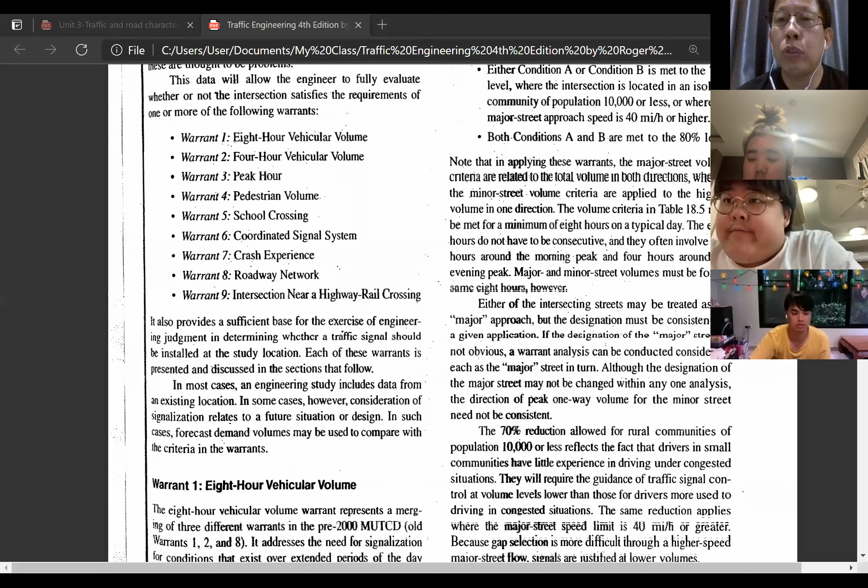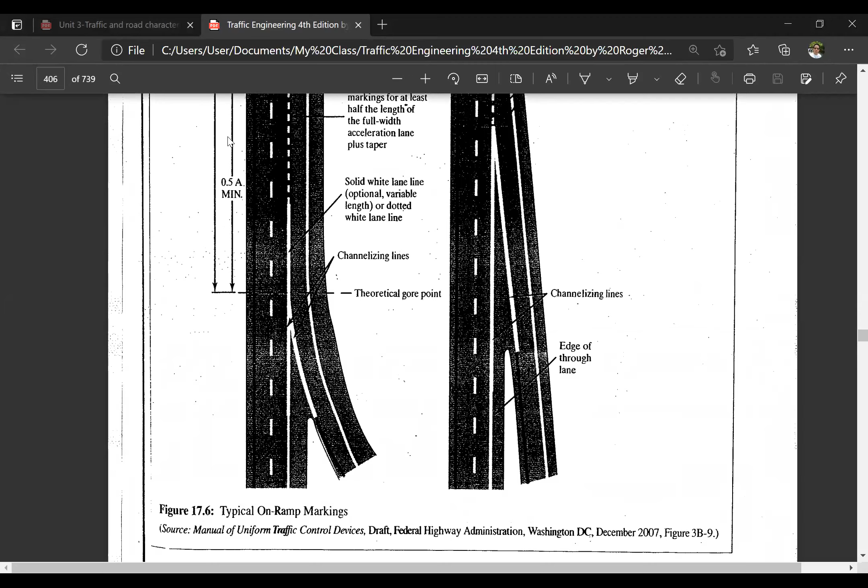This is the traffic engineering handbook. I said I want to start with chapter 18 first, because I will go back and forth.

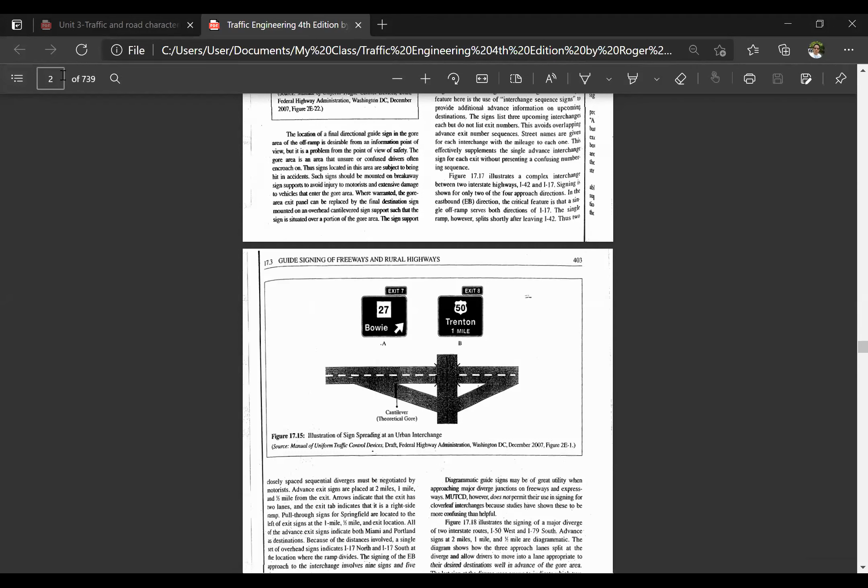This is the section. I found an interesting link for you with many presentations related to highway engineering and other resources. This is what I found. I don't know whether you have ever found this, but I think this link is cool.

Slide player. Okay, I got a nice summary of this chapter, the intersection control chapter, from this link. It's saving me a lot of time in summarizing the details of this chapter into these slides, and other resources can be found here too.

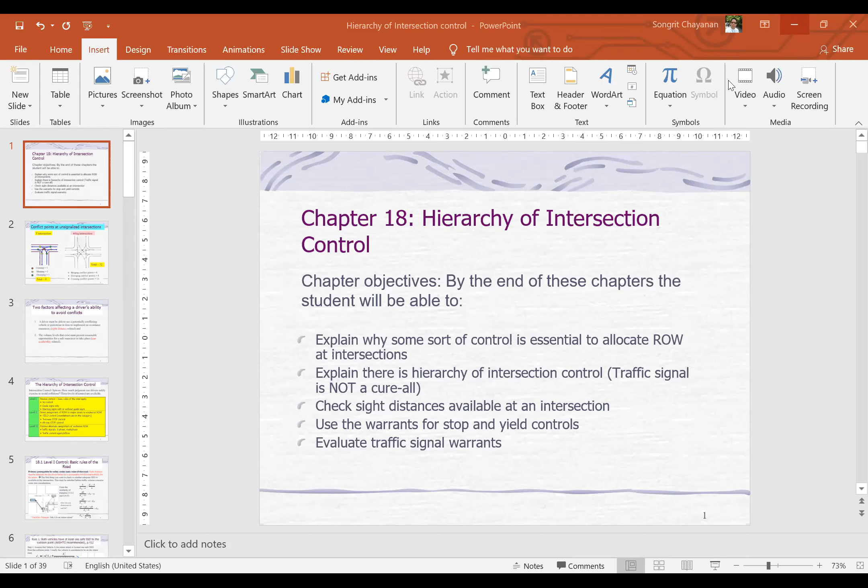Okay, is this my screen, right?

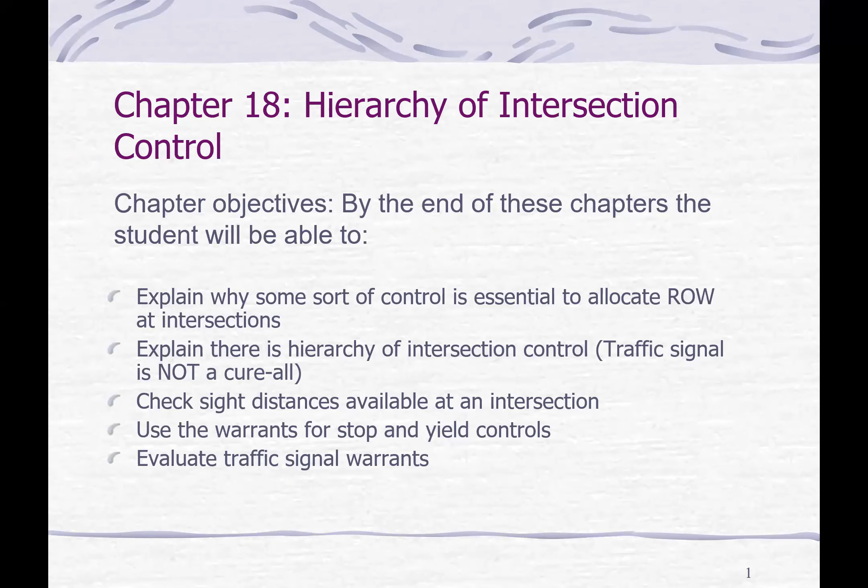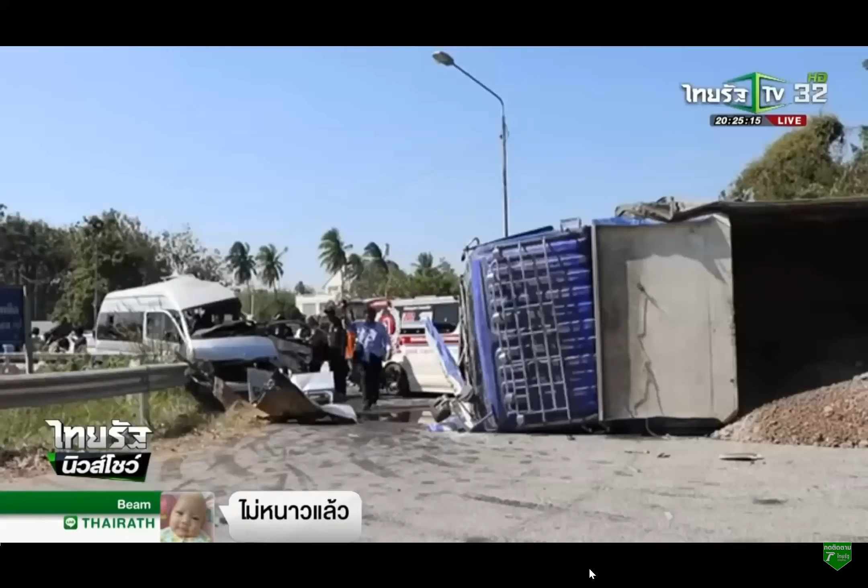What do you think? Did you see the clip? Yes, I saw it. Okay, what do you think about this intersection?

Can you kindly guess and explain from the physical, I mean, road geometry? What do you think? I'll share the screen.

Okay. If you've seen from this angle, this is from the CCTV angle. You may not see all the signs very well, but it's clear that the van did not stop at all, because maybe the driver was not familiar with this area.

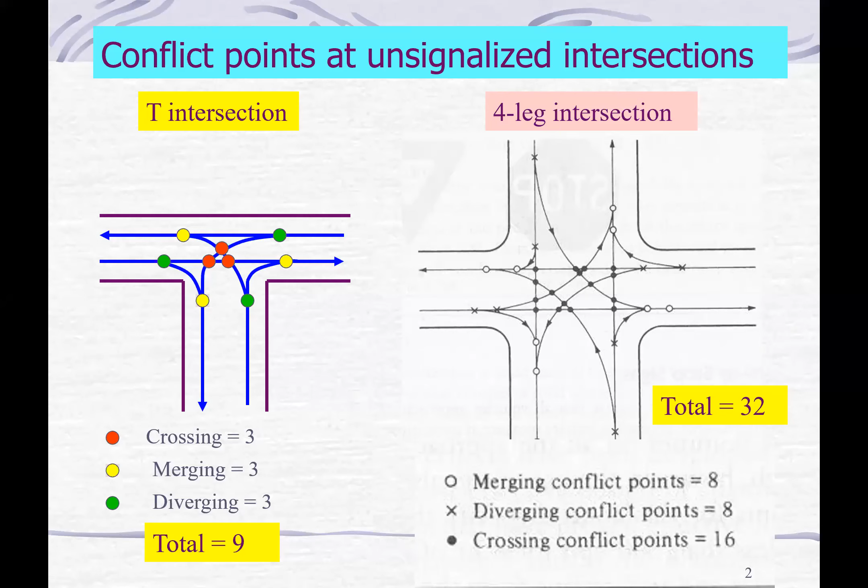So not only the diagrams that I show, but driver ability, like those examples. If there are enough sight distances for them, for either the truck driver or the van driver, to be able to stop ahead, then that collision wouldn't occur.

So there are two factors affecting a driver's ability. One is a driver must be able to see a potential conflicting vehicle or pedestrian in time to be able to avoid the collision. That means to be able to brake and stop safely.

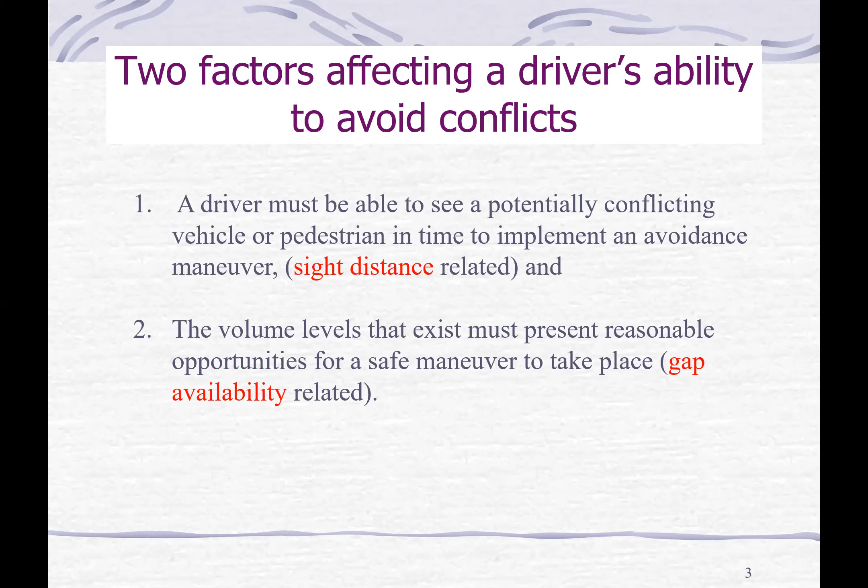Secondly, the volume levels that exist must present reasonable opportunities for a safe maneuver to take place. That means the road you are crossing or entering has enough gap for you to get in. If these two are not met, then as a highway engineer or traffic engineer, you need to consider some other methods to protect this driver.

Okay, there are three levels of control. The first level is passive control, the basic rule of the road. This may be okay in the United States, but I think it's very, very dangerous, like the situation you just saw in Thailand. No control means maybe a street in a residential area with very low volume — you place only a guide sign or warning sign without guide control.

A warning like 'intersection ahead', but there's no such control as stop control.

For level 2, you have a direct assignment of right of way to the major street, or rotational right of way. Rotational right of way means a roundabout. For major streets or major roads, most of the time they are bigger with higher volumes.

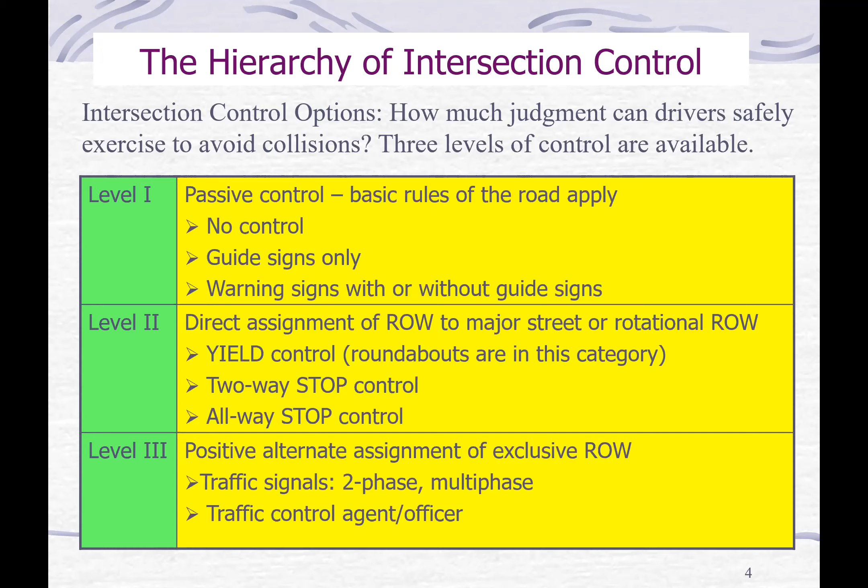Mostly when you put the signal control, the trade-off is there will be more vehicle delays. Okay, so that is the trade-off.

Let's come to the basic rule of road. The basic rule of road is identified as the sight distance. When we talk about sight distance, we talk about the ability that a driver can see potential hazards on oncoming traffic, or on the triangle on the corner like this.

So from the picture you see here, this is the major road on the horizontal, and this is the minor road. As I stated earlier, the minor road may be crossing the major road, or it may just get out on this side only.

This area, presume, is the obstacle, like trees, buildings, or even a tent. Somehow a lot of them become buildings, so that gives you the idea that the stopping sight distance may not be enough for those drivers to make a safe stopping, braking.

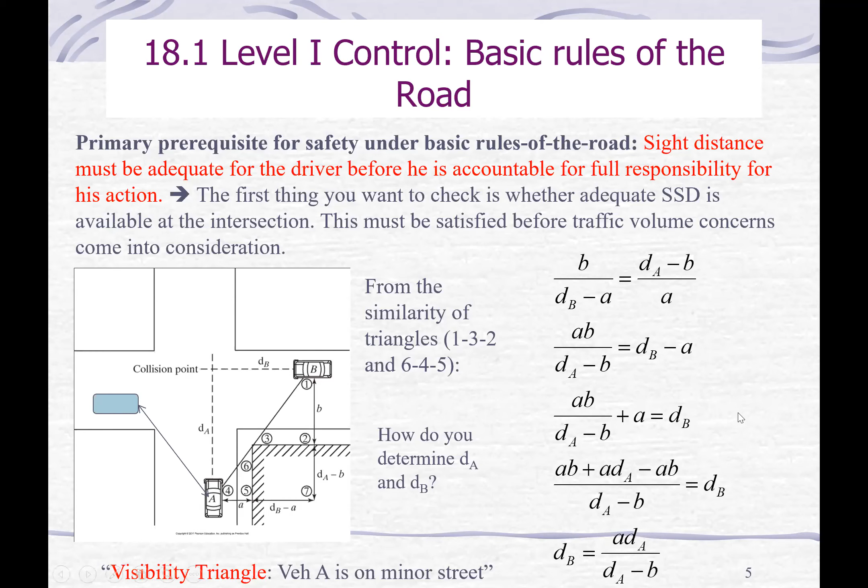What you need to do is find the minimum dB. Let's go to each step. From AASHTO recommendation, stated in page number 412 in that article I sent to you earlier, this slide follows chapter 18 and stated as a reference very well. You can go back and look through that article and text again.

Step 1: assume that vehicle A right here is on the minor street, located one stopping sight distance from the collision point, which is dA. dA can be defined from this equation: 1.47 times speed of vehicle A times stopping time of decision, T, which is equivalent to 2.5 seconds.

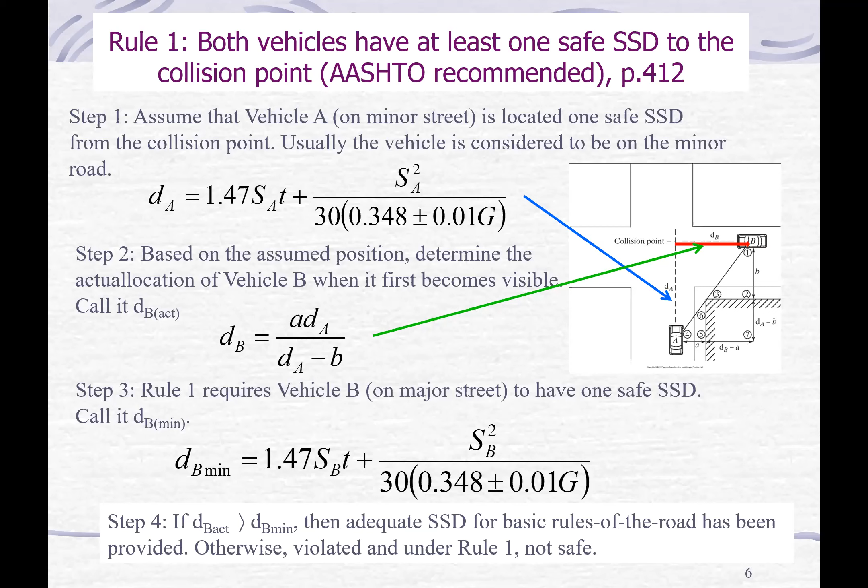According to those equations, if you found that dB act is less than dB min, then what you should do? Then no control cannot be permitted, which means you have to do something—you have to put a stop sign, or maybe consider putting the speed limit on the major street, or remove the obstacles to increase the sight distance.

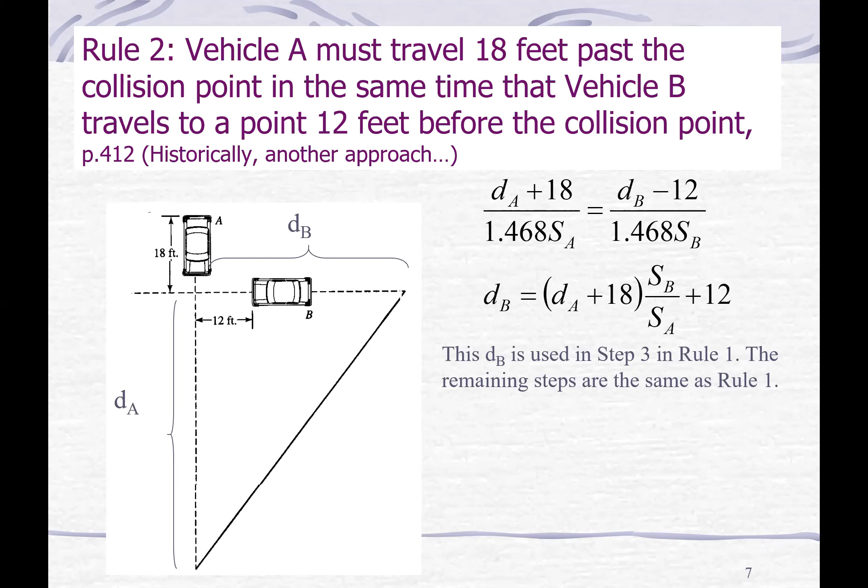So from what you learned from the equation, you should follow the steps to calculate the numbers. First, find out the distance A, which can be found as...

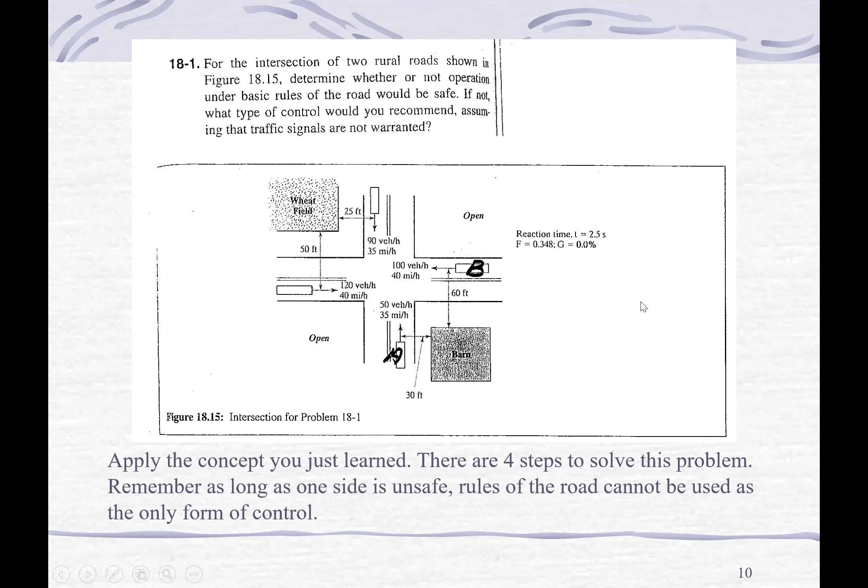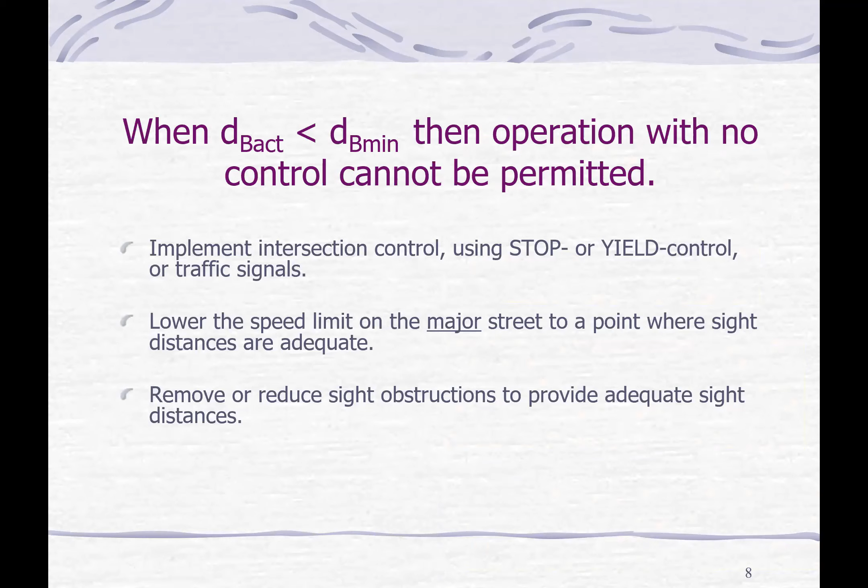That's the first level, so if it's not enough, go back to the recommendations here. You have to do something with this, find out which one is most proper. Sometimes number 3 is quite difficult, as I said it's just a huge building, how can you remove a building? You may need to put a signal control; that is under the warrant. I will go further with the warrant later.

So for the second level, which is level 2, the yield and stop control. Anyhow, for the Thailand situation, I found this is very hard to apply because not many people follow this stop control. According to the law of signs, stop control is actually the first one of the sign control. Do you believe that?

I want to find out. Share. Okay, you see that?

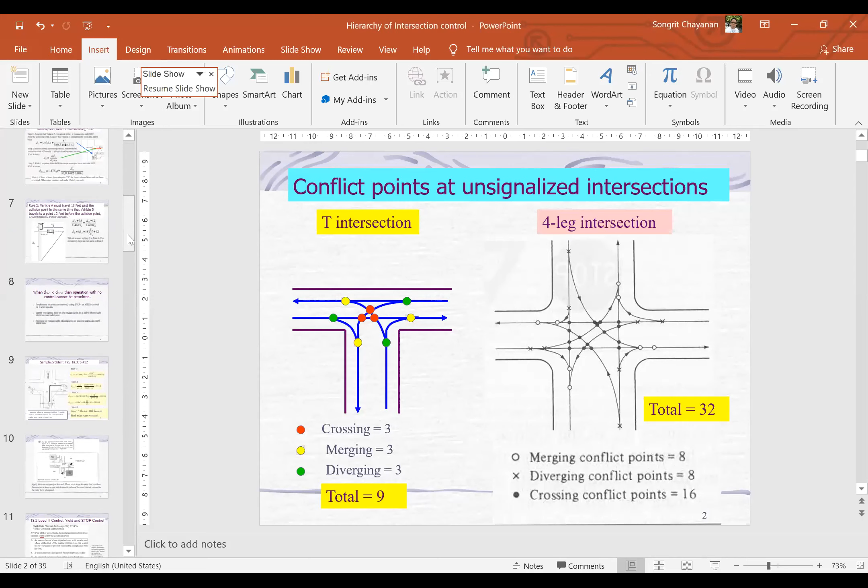So the stop or yield sign should be used at an intersection if one or more of the following conditions exist: A, an intersection of a less important road with a main road where application of the normal right-of-way rule would not be expected to provide reasonable compliance with the law. Condition B, a street entering a designated through highway. Or C, an unsignalized intersection within a signalized area.

C is like an area where there are many intersections controlled with signalized control, and there are some intersections inside where there's no signal, so you will put this type of stop control in there.

For the two-way stop signs, we will put them on the minor road, the minor street, as stated here. Typically, they don't want you to put all-way stop unless it's necessary, so you put the less restricted option first, which is two-way stop.

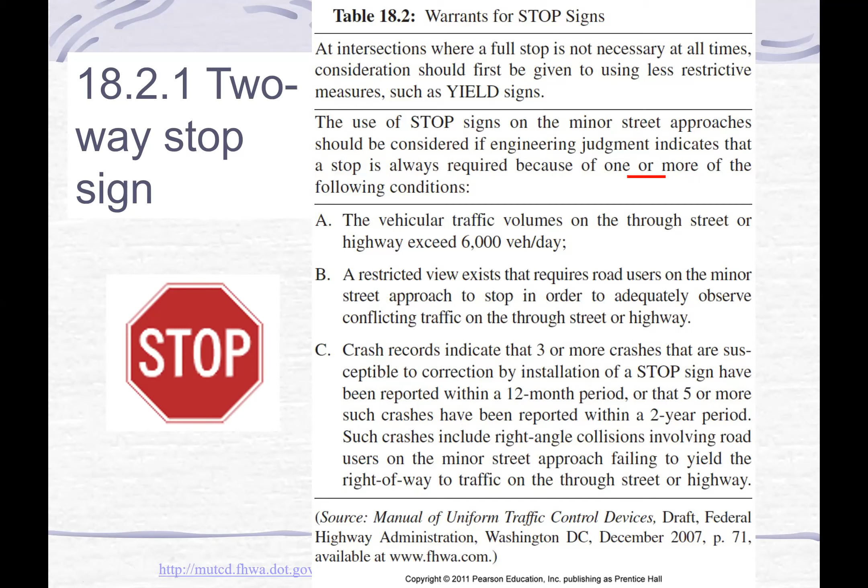There are more details on this. If stop signs are already placed, you may need to check if 3 or more crashes have been reported within 1 year, or in 2 years for some criteria. You want to consider these numbers before determining whether you're going to put intersection control with a traffic light.

This is the example problem for stop control. There will be something here for you to understand.

So DA stop is equivalent to 18 plus DCL. Where does the 18 come from? It comes from these two numbers: 10 feet and 8 feet. The 10 feet comes from the edge of curb to the stop line, and the 8 feet from the front bumper to the driver.

If there is a stop sign right here, from the stop sign or stop line - the line being the road pavement marking - mostly the stop line and stop sign should be placed together. So if there is a stop line here, 10 feet is from here to the front bumper, and 8 feet from the front bumper to the driver's eyes.

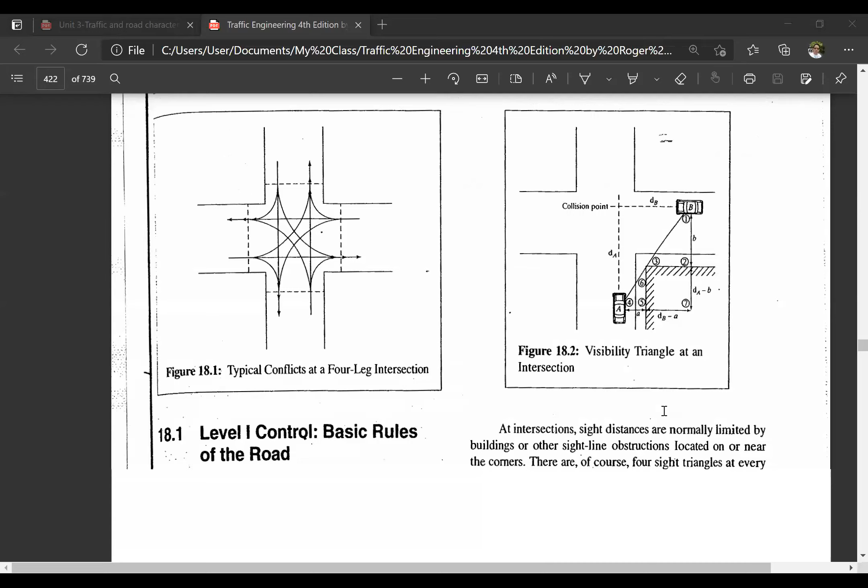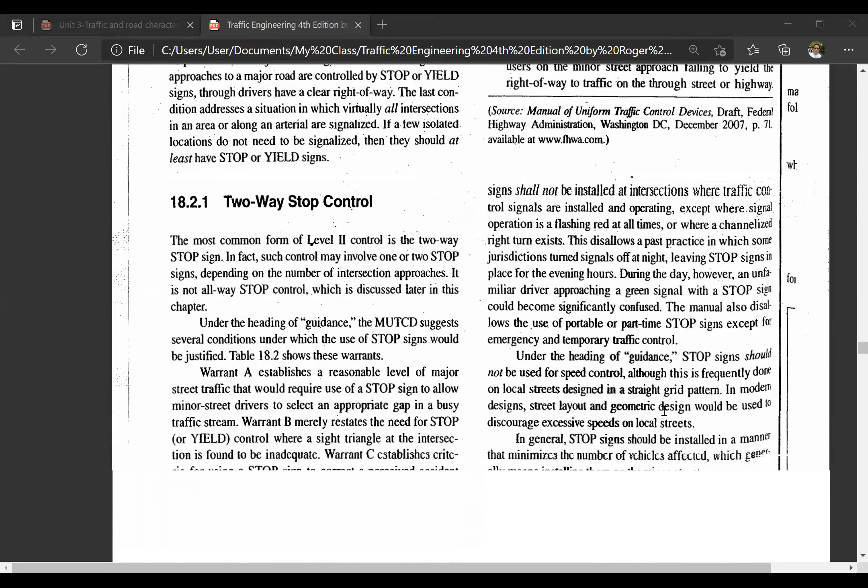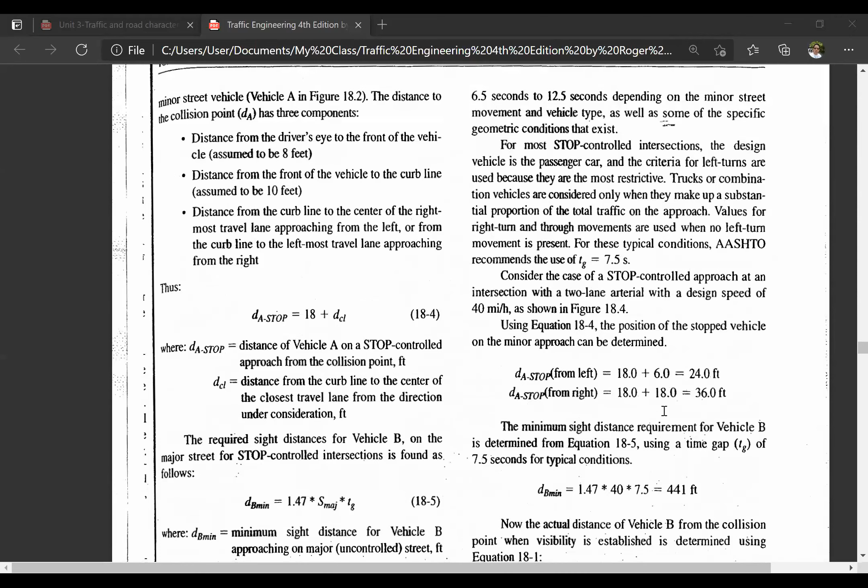Criteria for right turn and through movements are used when no left turn movement is present. AASHTO recommends use of TG 7.5, where TG is time gap. Time gap ranges from about 6.5 to 12.5 seconds, but the recommended number is 7.5 seconds.

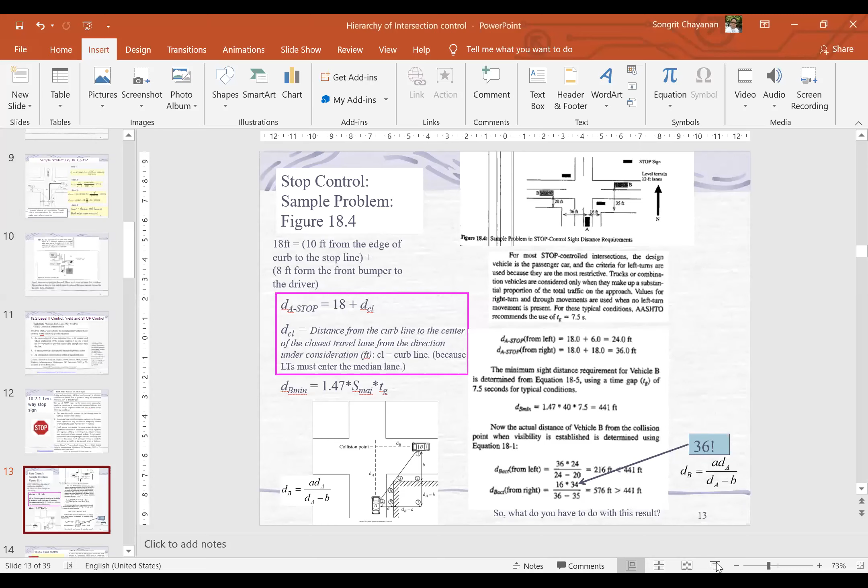So it's a 12-foot lane, and this is 6. So 12 plus 6 is 18. So the dA stop from the right is 18 plus 18, which is 36 feet. This one, CL is 6, because it's just half of the lane. So 18 plus 6 is 24 feet.

So the minimum sight distance required for vehicle B can be found from the equation 18.5 using the time gap of 7.5 seconds. So B min is 1.47 times 40 miles per hour times 7.5, which is 441 feet.

Now identify the actual distance for vehicle B. B actual can be found from equation 18.1: 36 times 24, 36 being a, divided by 24 minus 20. This is 20 here. The result is 216 feet, which is less than 441.

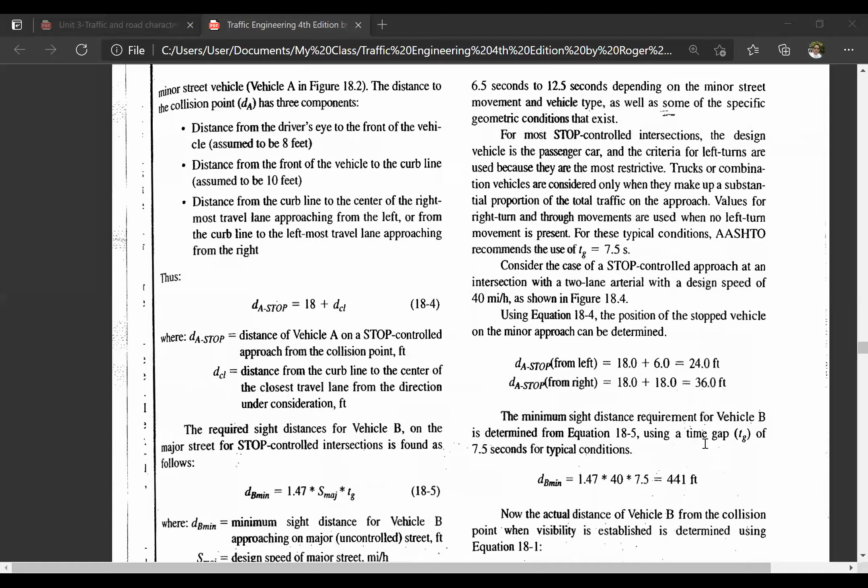Where the stop sign sight distance criteria is not met, it is recommended that speed limit reduction should be posted to a level that allows appropriate sight distance for the minor street. Removal or cutting back of sight obstruction is also a potential solution, but this is often impossible in developed areas where buildings are the principal obstructions.

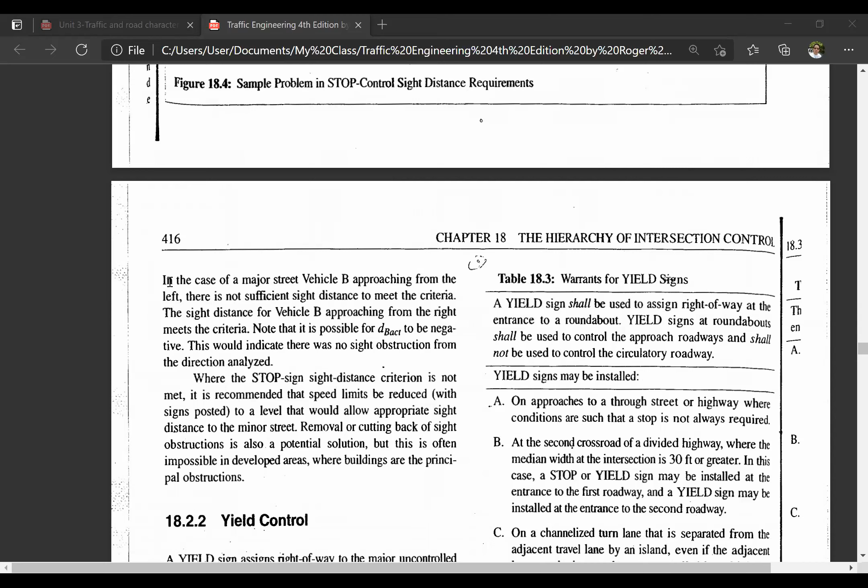So when the stop sign criteria is not met, what do you do? Lower the speed limit, or remove the obstacle. But as stated, if this happens in the city, then that would be out of control, right?

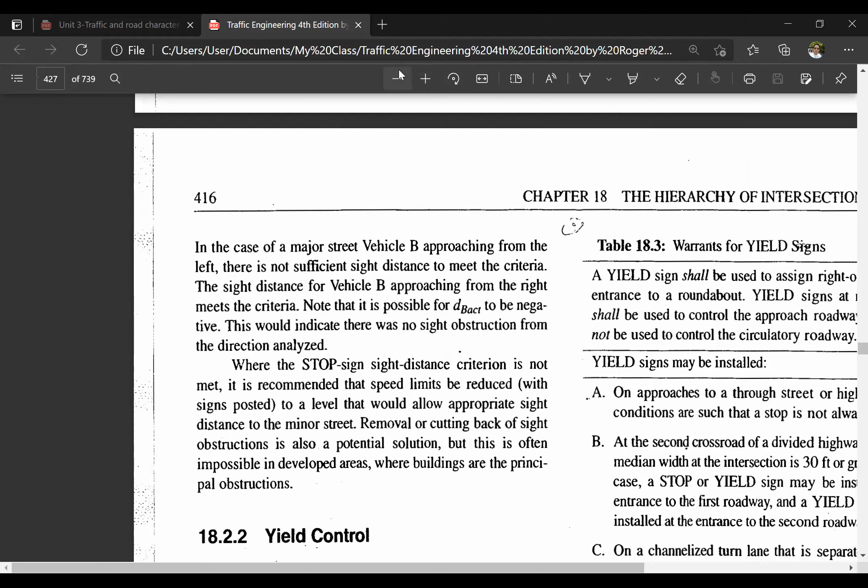At this point, is there any questions? No, there isn't.

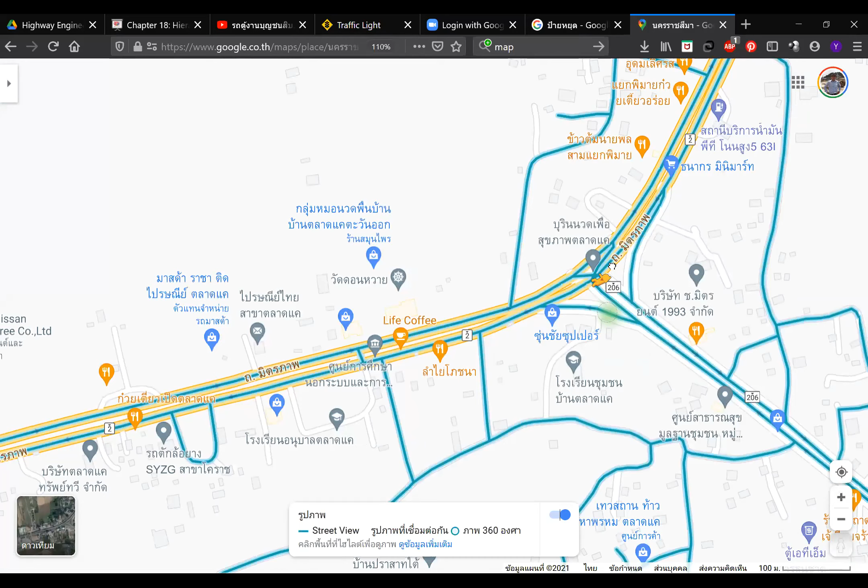Is there any other place? Okay. There's no, it's exclusive lane too, turn only, right? Besides, no yield sign.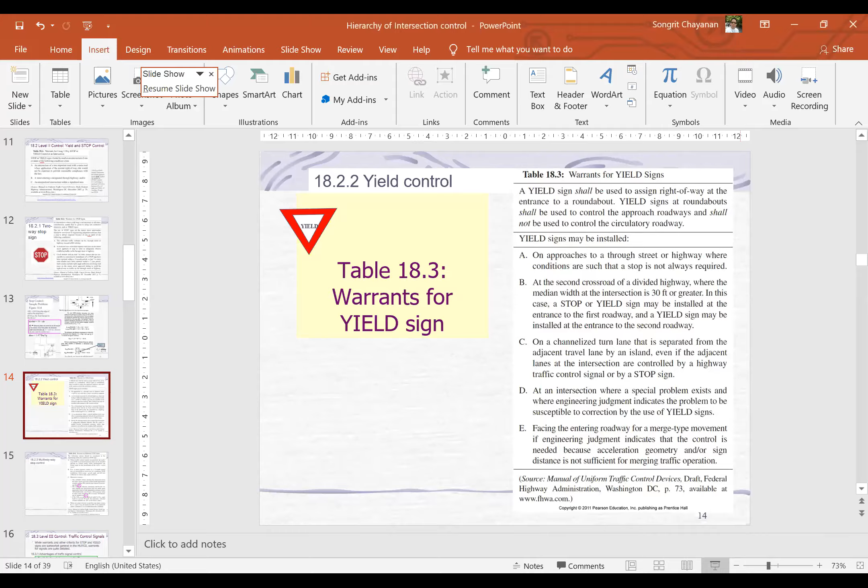For the YIELD sign, according to criteria A, B, C, D, and E. Okay, these are the criteria to put the YIELD sign by high time. Okay. For the multi-way stop control or all-way stop control, you will look at the criteria here. So A is where traffic control signals are justified.

That means when you consider the volumes and the signal control should be placed, but you have to wait because there may be no budget. You can put the multi-way stop sign or all-way stop sign as an interim measure before getting the installation of the traffic control signal. There were 5 or more reported crashes in a 12 month period.

Okay, number 3, the minimum volumes. Consider this: the vehicle volumes entering the intersection from the major street approach on both directions average at least 300 vehicles per hour for any 8 hours of an average day. Okay, that means for any 8 hours, at least 300 vehicles per hour using this section of the road.

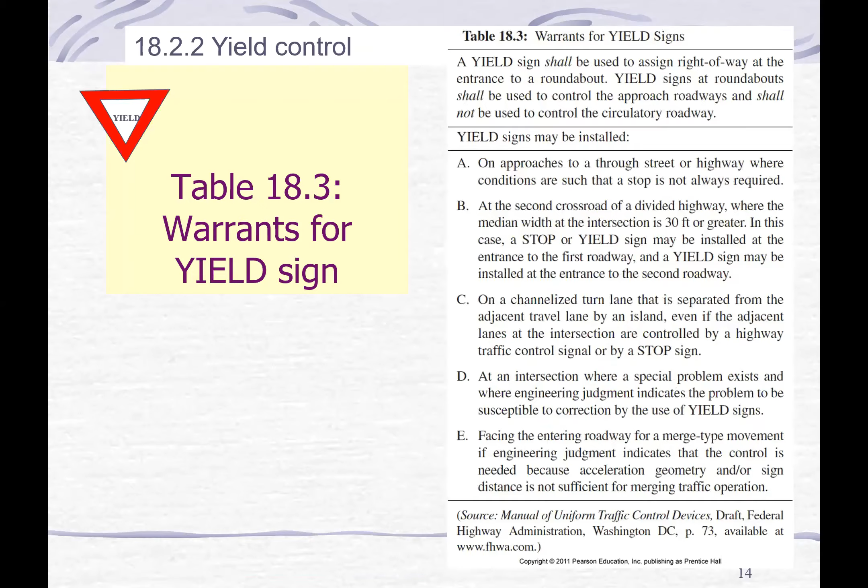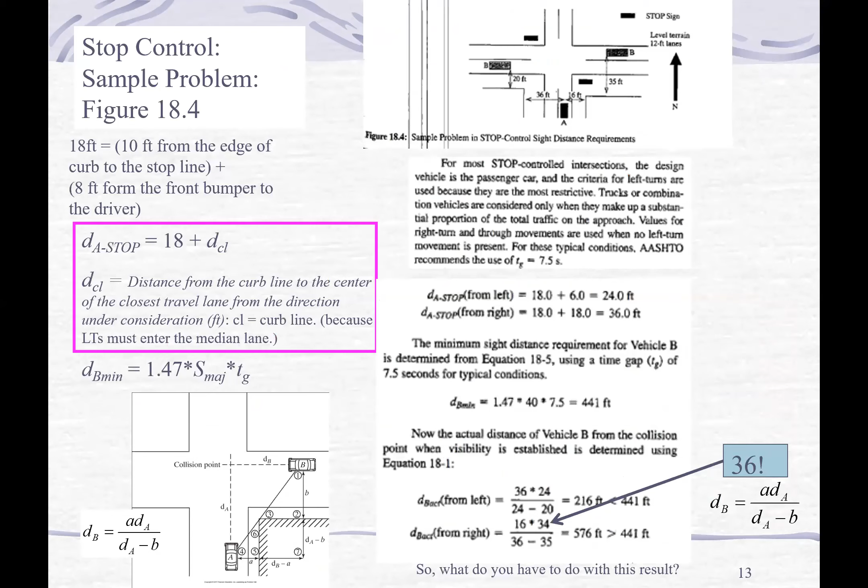So from level 2, okay, let's summarize. YIELD sign, 2-way stop sign, all-way stop sign. Okay. These are considerations, or what we call warrants.

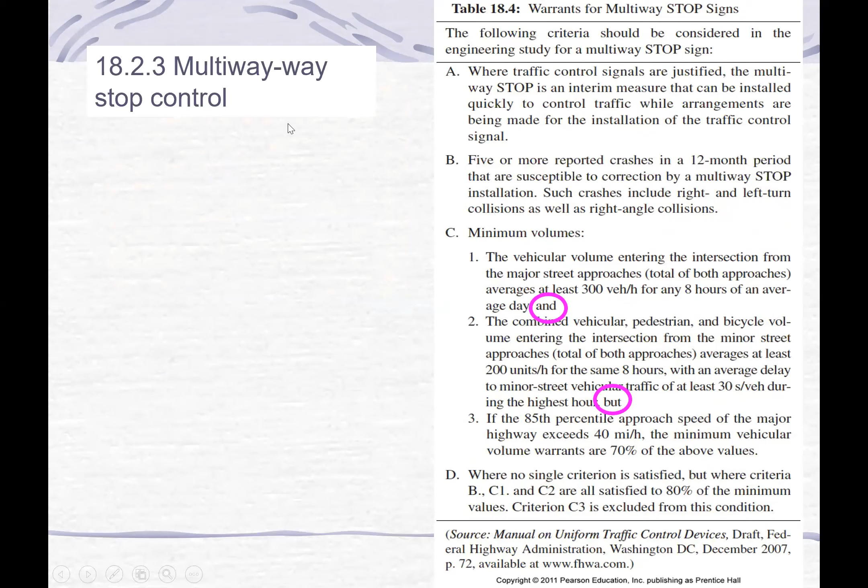If these numbers are met, you will put the all-way stop signs. However, as I mentioned earlier, level 2 is very difficult to apply in Thailand's road network.

We found that we either put the stop on the minor street and no yield. Very few yield signs you will find. Just put the stop on the minor street, and all above that, they put the signal.

The cost of installation for a signal on a small intersection would be about 3.5 million baht. However, someone said to save one fatality, that would be a lot more cost effective.

My second homework for you is to find out the cost of fatality per person in Thailand. Okay, that's two homeworks for you already. One is that example, second is find out the cost of fatality per person in Thailand.

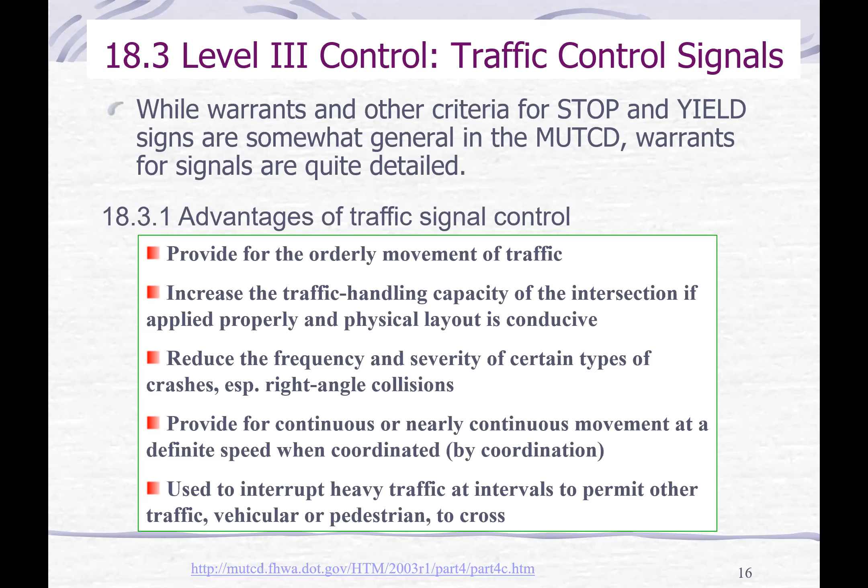For example, if you place them from school greater than 200 meters, you will less likely see students use those. Even they said they will hire policemen to wave and block the traffic during the rush hour period on the major streets.

Okay, disadvantages. Excessive delay if the timing is improper, you know, set up.

Excessive disobedience of signal indications when red interval is improper or too long. Maybe it encourages red light running. This is what I mentioned previously. Somehow if they put wrong timing at night, late at night, too long, then there will be someone who violated the red signal.

What they do is, instead of turning them off, they give the light to be the flashing light instead, so let the drivers decide whether they should stop or go. Red flashing is equivalent to a stop sign. Yellow flashing is equivalent to a yield sign.

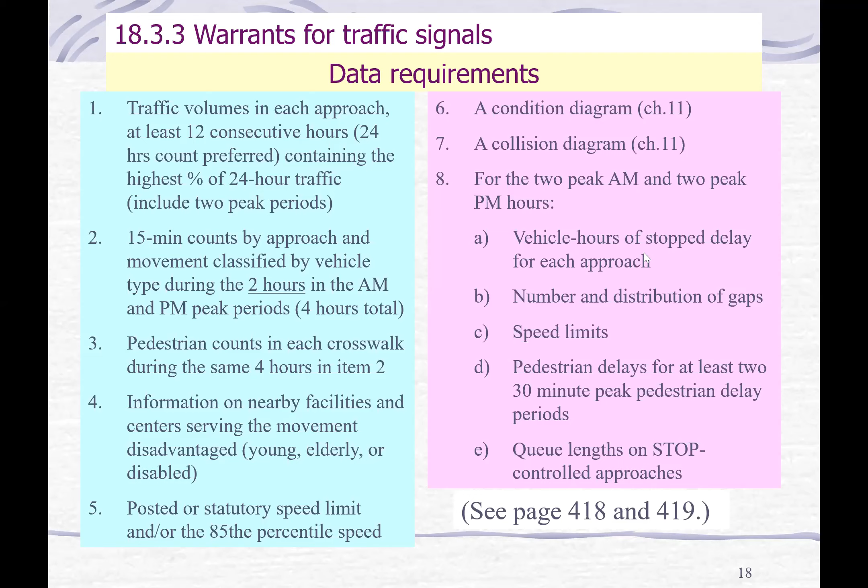In MUTCD, Manual on Uniform Traffic Control Devices - that's what it stands for - the version 2009 has placed 9 warrants for traffic signals. It said that this is just guidance, not specs, so engineering judgment is still required.

The first 3 warrants are all about vehicular volumes. The 4th and 5th are about pedestrian volumes, including school crossing. Warrant number 6 is a little different - this is what we talked about earlier, coordination of the signal system. If there are nearby signals already in place, then coordination of the new signal at the intersection you are forecasting may be required. Warrant number 7 talks about accident or crash experience. It is roadway network, and the 8th and the 9th is the intersection near a highway rail crossing - if there's a railroad crossing, warrant 9 will take place. So when you count the volume, especially vehicular volumes, warrants 1, 2, 3 should be considered.

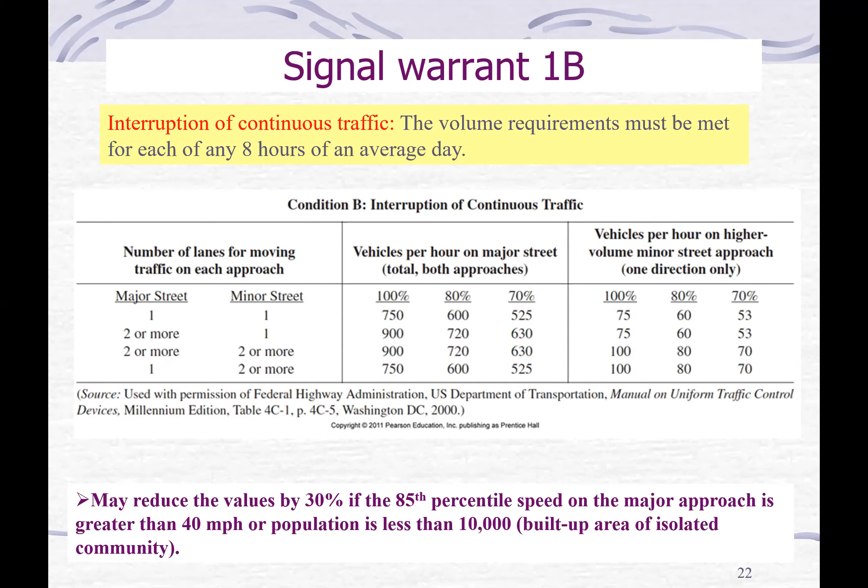The last one is 70% - this is in the area where the population is less than 10,000 people, a small city, or the 85th percentile of user speed is greater than 40 miles per hour - take the 70% there. This is just warrant 1. Warrant 1 has 2 conditions. Only in exceptional cases, when none of these warrants are satisfied, but the first 2 conditions of warrant 1 are satisfied to the extent of 80% of the stipulated volume - this is what I just talked about earlier, signal warrant, when we pick the 80%.

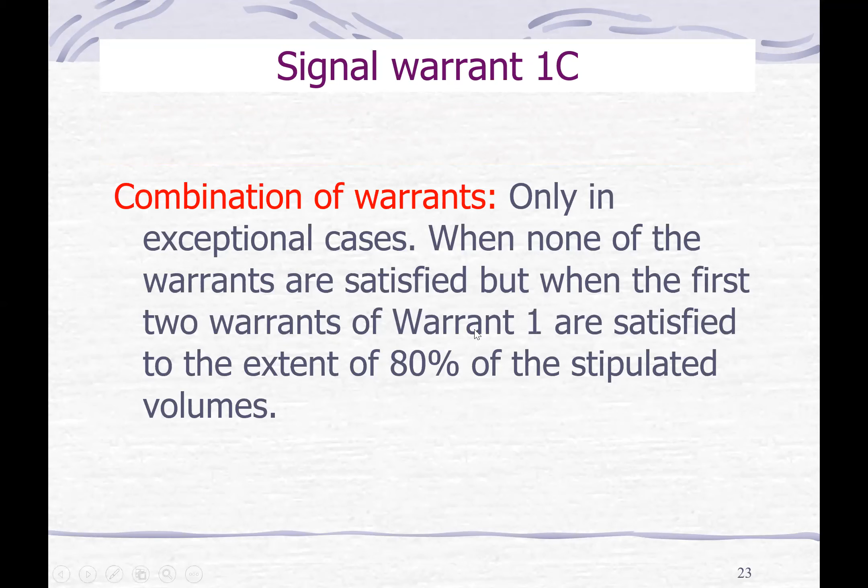That is the 8-hour condition, the minimum condition in all these.

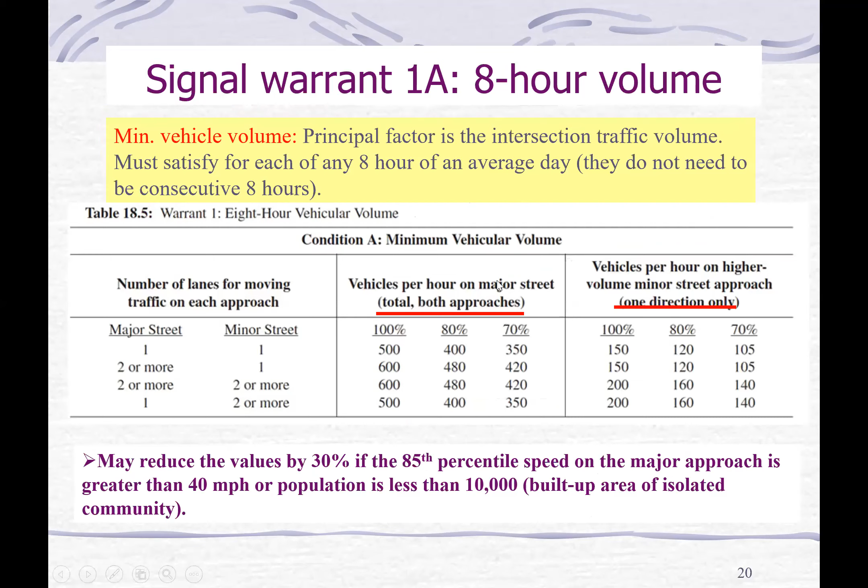For the 4-hour volumes condition, you have to check each of the 4 hours on the average day. If this warrant shall be met, then a signal control can be placed. At least 4 hours, during these 4 hours, at least this number should be met for the major street on the total approaches.

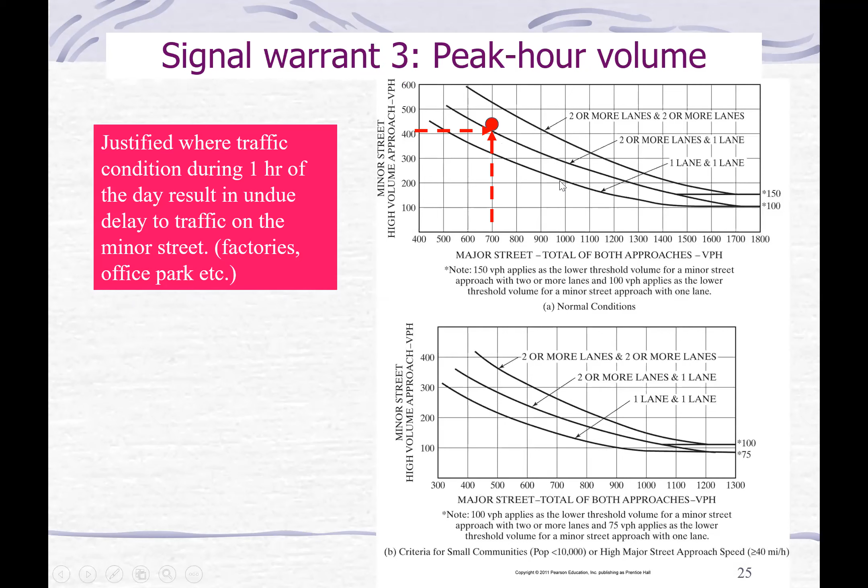Come back here. Under these 9 warrants, if either one is met, then a signal control can be installed.

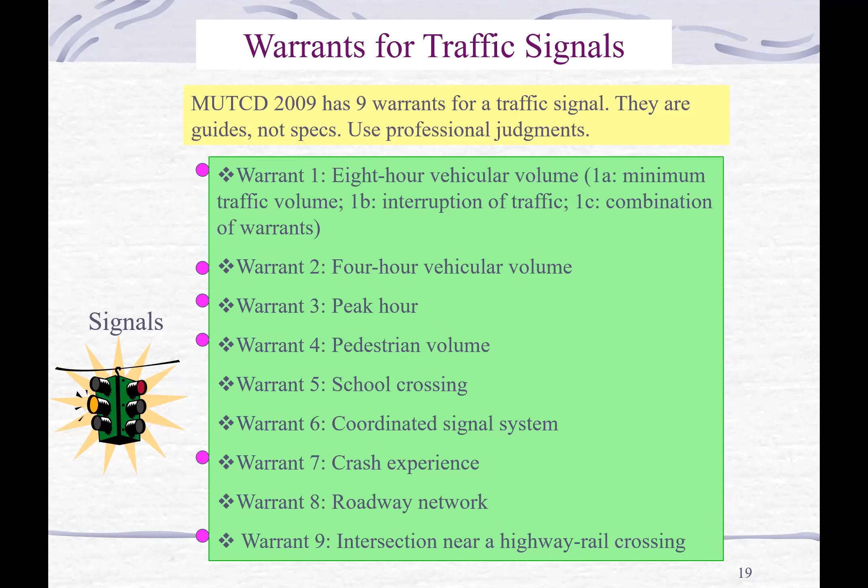So some may find that there are many crashes at this intersection, more than 5 crashes per year, then they put a signal here. However, it's hard to say that just this warrant in Thailand, when they fixed it with the signal, somehow made the crashes disappear. However, there were some delays that happened. So at night, they started to use flashing instead, and still the accidents occur because of that.

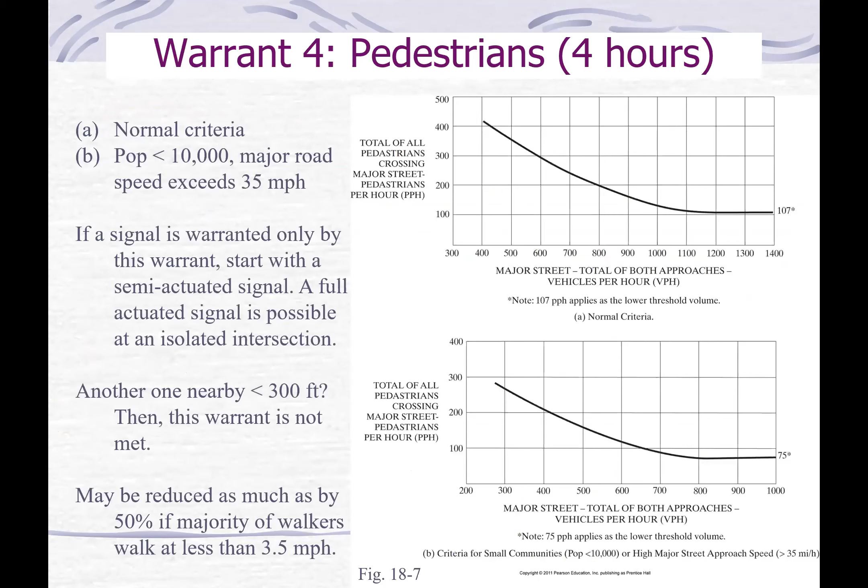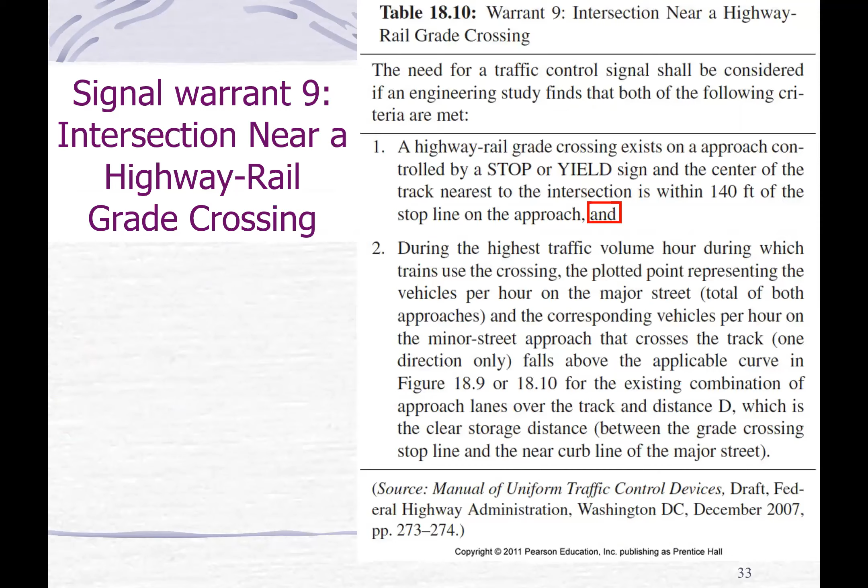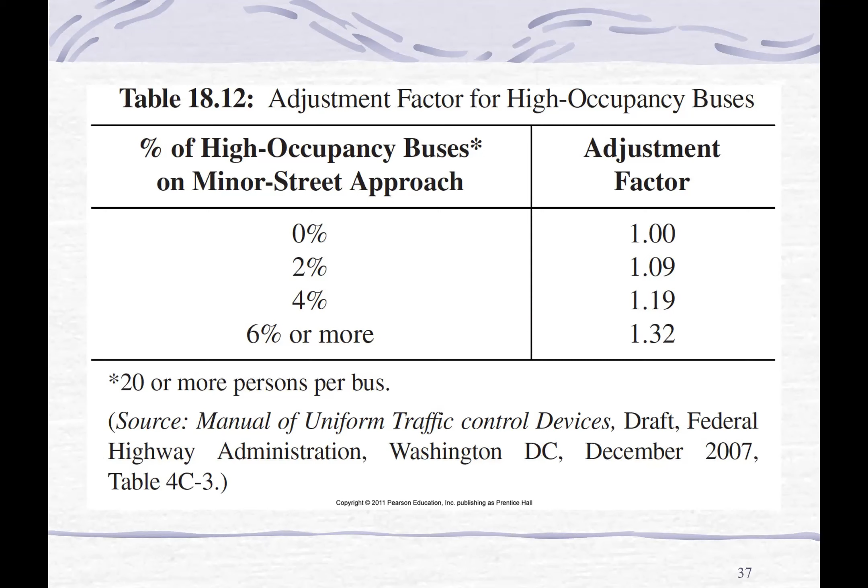Warrant 4: school, coordination, crashes, roadway network, and railroad crossing. I just give you the idea that this should be considered. But as I mentioned, you may just be able to look it up. I just emphasized the first 3 warrants.

From here, I want to share with you something else. I want you to see this.

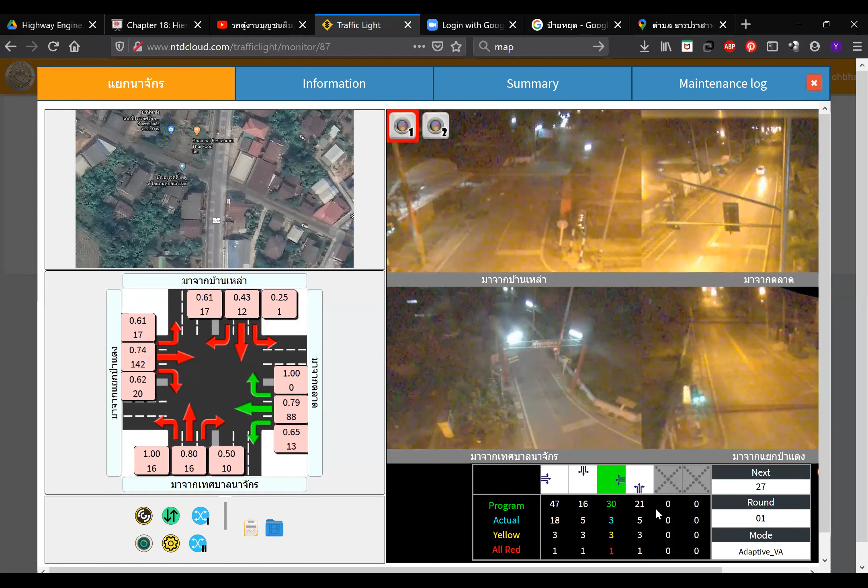Once we put the signals, we use what we call adaptive control to control the traffic. Right now it's about 8:15 p.m. and there's no traffic anymore. The signal is giving the green light on this side. Right here, what you see is the real-time traffic condition.

So this is an example, okay. And this one is at another intersection. Okay, this one is a little in the city. The number showing here is the number of vehicle counts, and the number above here is the peak hour factor.

Peak hour factor. At this moment, on this side, coming from So Char Hae, it's just 17 through vehicles. Turning left is 43 vehicles, and turning right is 3.

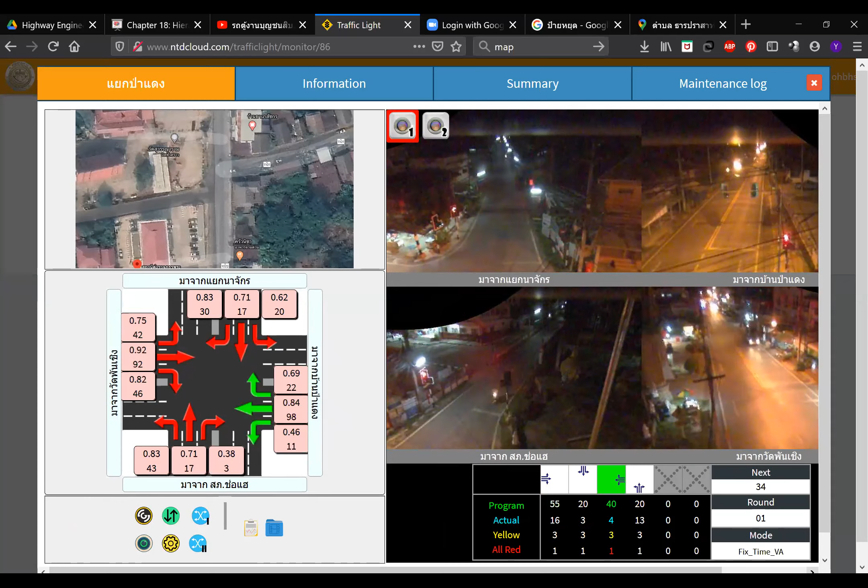From what I've seen here, the main road should be along this side, Wat Phan Cherng and then Ban Pa Daeng, okay. These are main roads. So they will get the green.

But at this one, it's different from the previous intersection because the mode shown here is fixed time. Okay, fixed time, it's not adaptive. I'll talk about this later, about the difference between fixed time mode and adaptive. Okay, this is a different one.

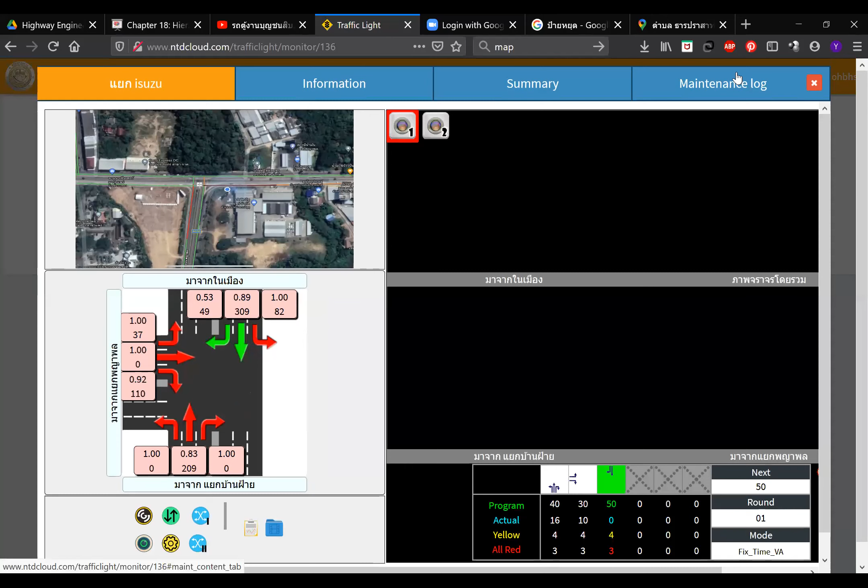Let's take a look a little more in here. This one is a very small location, a three-way intersection. Okay, no more traffic, but let's take a look at the information of the summary. Okay, there's no counting information here. There are other information showing here.

Anyway, just to give you an idea of what operations we can test in the real world. Nowadays the signals can be controlled from my computer, from my laptop like this. Can be changed, can be modified, can be monitored. So we don't really need policemen to control the signals. Let the technology, or the engine of the controller, control the signals.